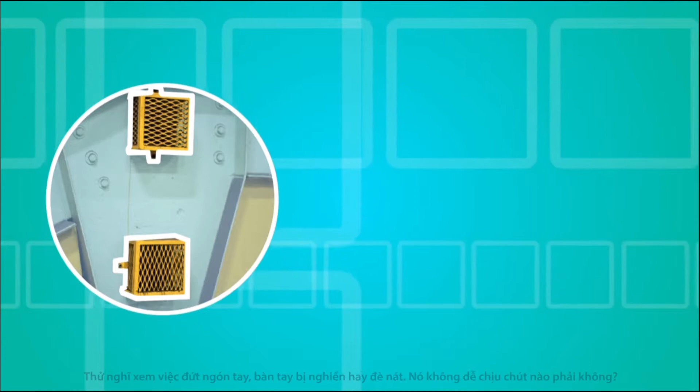Machine guards play a significant role in preventing injuries. Without these essential safety mechanisms in place, you could suffer terrible injuries. Think severed fingers, crushed hands, and scalping. Not a pleasant thought, is it?

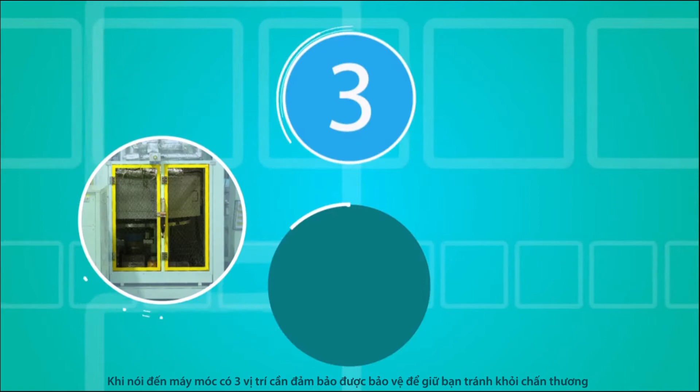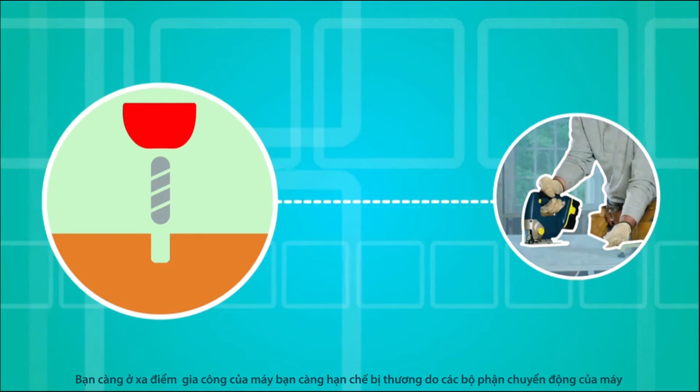When it comes to machinery, there are 3 areas you need to make sure are guarded to keep you from being injured. The first is the point of operation. This is where material is shaped, bored, cut, or formed. The further away you are from a machine's point of operation, the less likely you are to be injured by that machine's moving parts. The second area to be guarded is the power transmission apparatus.

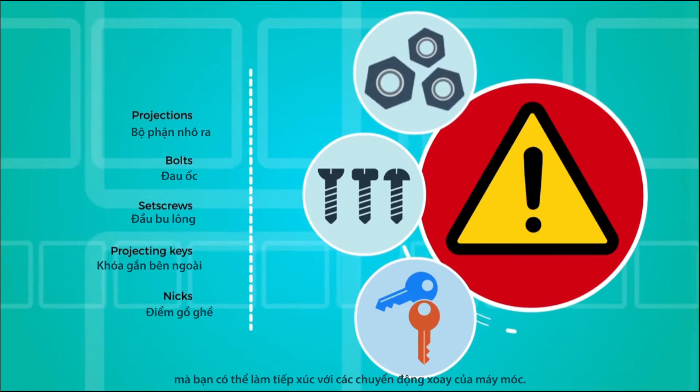This is the unit of a machine's mechanical system that feeds energy to the component doing the actual work. Things like gears, cams, cranks, pulleys, flywheels, belts, couplings, chains, connecting rods and spindles. You're even more at risk if projections like abrasions, bolts, set screws, projecting keys or nicks are exposed to the rotating parts of machinery.

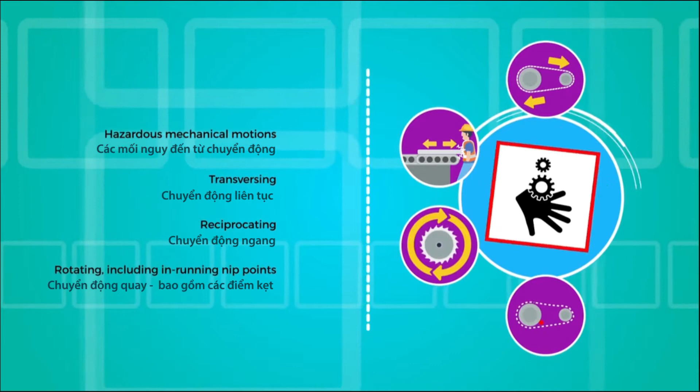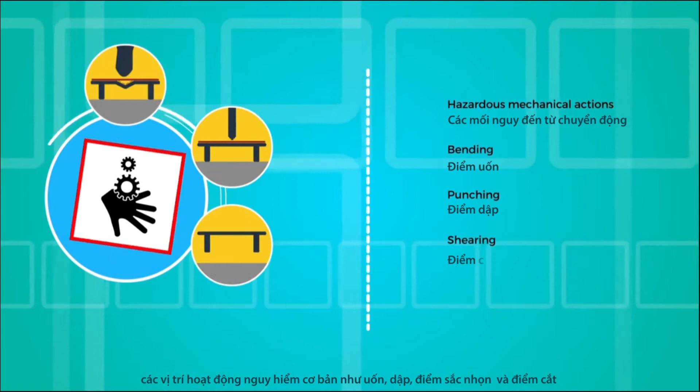The third area you need to guard involves all other moving parts of a machine, for instance, auxiliary parts and feed mechanisms, as well as transverse, rotating, and reciprocating bits. The basic types of hazardous mechanical motions are transversing, reciprocating, and rotating, including in-running nip points. In addition to hazardous mechanical motions, you also need to take into account basic hazardous mechanical actions, things like bending, punching, shearing, and cutting.

As your employer, whenever we put upgraded safeguards or new equipment into service, we'll be sure to train you, whether you're a new operator or part of the setup or maintenance staff. The same applies if you're assigned to a new task or a machine that involves moving bits. And when you undergo operator training, we'll make sure you get proper instructional and practical training. We'll teach you how to identify various hazards associated with specific equipment or machines, and we'll make sure you know the importance of safeguards, how to use them, and how they protect you from various hazards.

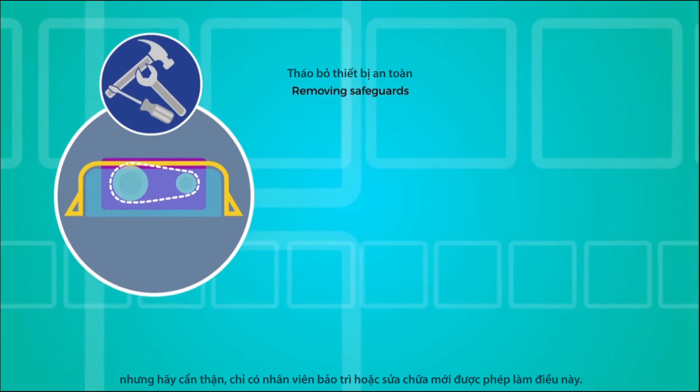You'll also learn about removing safeguards. But beware, only maintenance and repair staff are typically allowed to do this. You should let your superiors know immediately if a safeguard isn't offering the necessary protection or if it's missing or damaged.

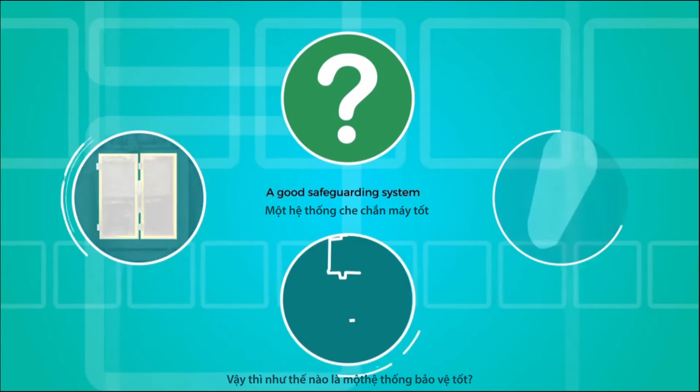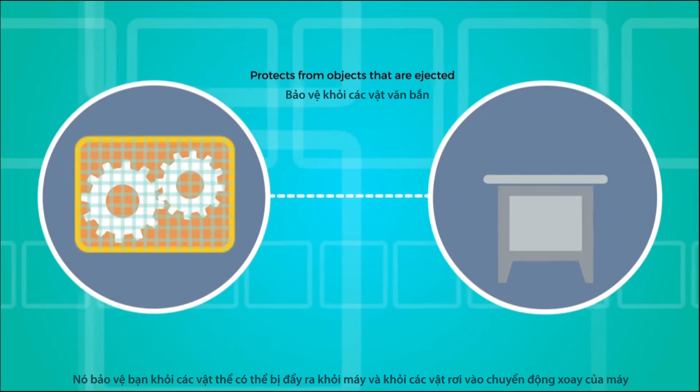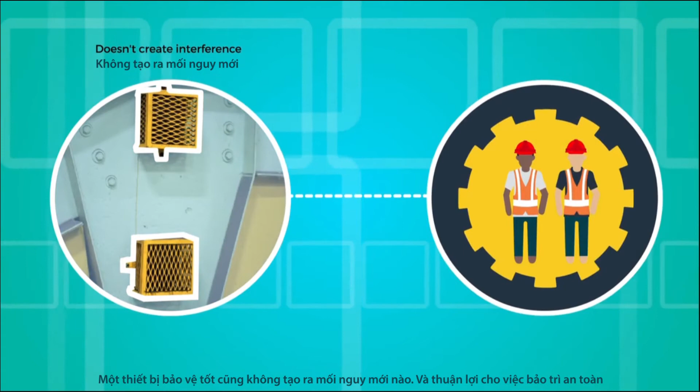So, what makes up a good safeguarding system? First, a good system prevents you from coming into contact with moving parts and is secure. It protects you from objects that can be ejected from a machine and from objects that fall onto or into the rotating parts of a machine. A good safeguarding system also doesn't create any new hazards or interference, and it allows for safe maintenance.

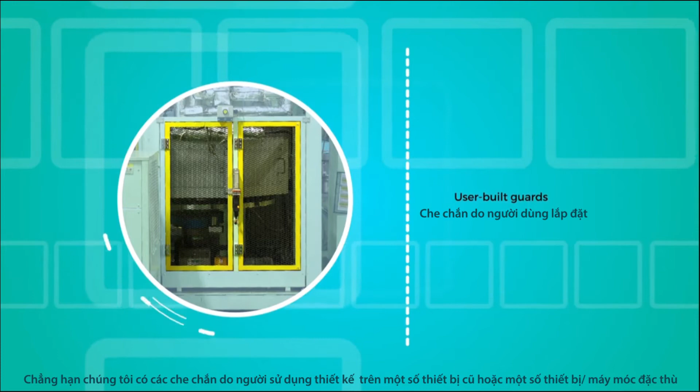Safeguarding systems are dependent on the machinery you use. For instance, we have user-built guards on some of the older or more unique machines that are still in use. This is because user-built guards are adaptable and can be installed on specific individual mechanisms. Manufacturer-built guards, on the other hand, are installed by the manufacturer of a machine. These safeguards are specific to the function and design of an individual machine and can be designed to support the machine in some way.

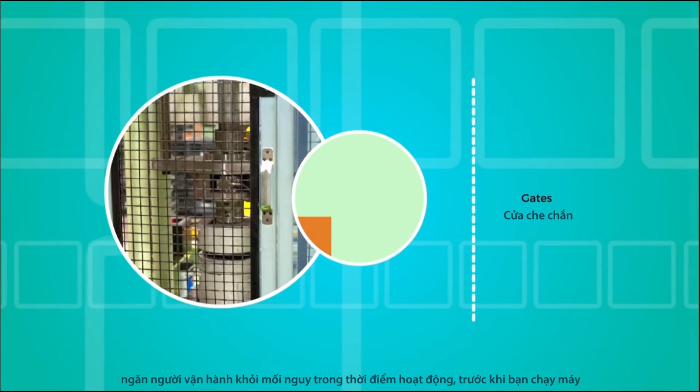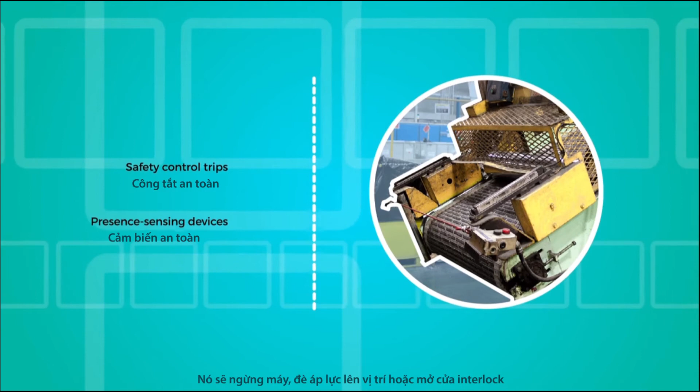Gates are guards that protect you as the operator at the point of operation, before you can even start the machine. Then there are safety control trips, which make use of pressure-sensing devices that will stop an operation if you apply more pressure than needed. Presence-sensing devices, on the other hand, will stop a machine if any of your body parts enter the perceived field of danger.

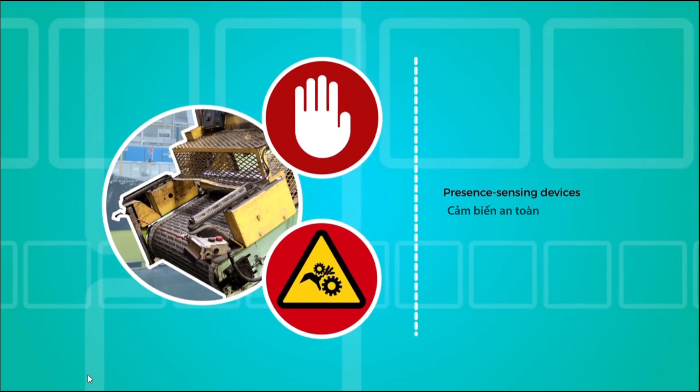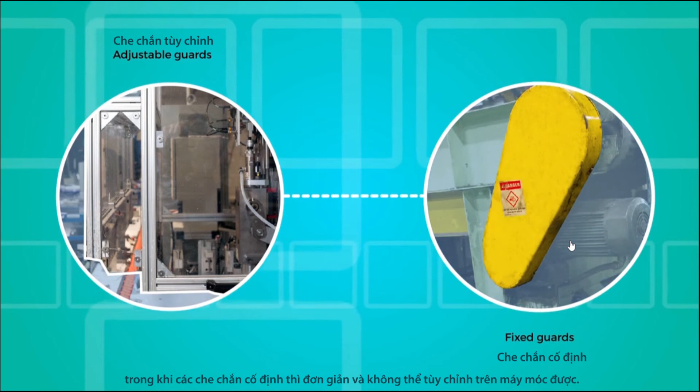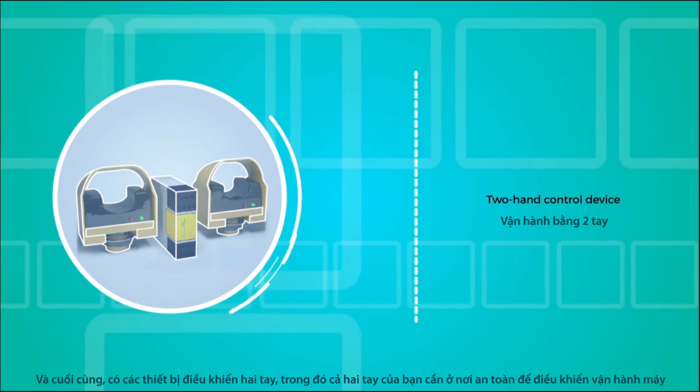Adjustable guards are flexible when it comes to accommodating various operations and different-sized pieces of machinery, while fixed guards are permanent, simple guards that cannot be removed from a machine. And finally, there are two-hand control devices, where both of your hands need to be in a safe place to use the machine attached to the device.

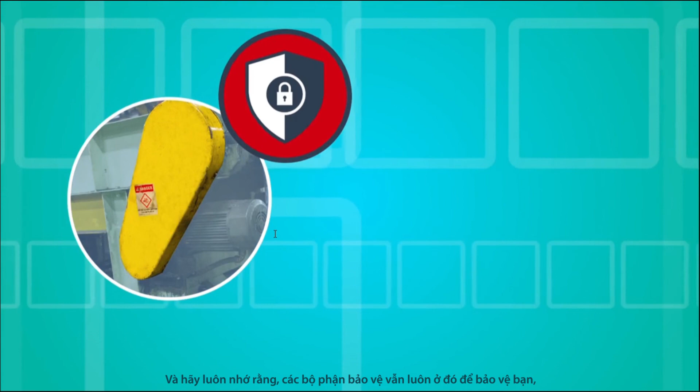Machine guarding is critical when it comes to preventing injury, so make sure you're aware of all the areas that contribute to risk and note the moving parts. And remember, safeguard systems are there to protect you, so never attempt to remove the guards we have in place. Keeping these safety measures in mind, answer the question that follows.